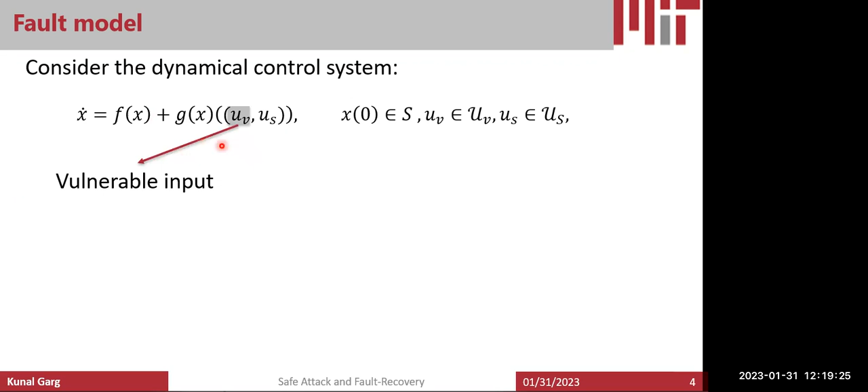We have some vulnerable inputs and some secure inputs, where we assume that these inputs cannot be attacked. These inputs cannot be modified from what was assigned by the user, and these vulnerable inputs can be manipulated in arbitrary ways as long as the assigned signal is still in the compact set of allowable signals, right? Even if we assign an arbitrary signal, the actuator itself would have some sort of saturation because of its physical limits. So we still consider that, but other than that, the signal could be anything.

A simple example would be either a faulty actuator in a quad rotor, in terms of the propeller itself or the motor being faulty, or you get an attack from an extraneous entity on one of the communication signals to the motor. What it can lead to is either loss of partial or full actuation in the control surface, and that would lead to certain issues in the normal behavior of the quad rotor. And we want to make sure that at the least the quad rotor should not crash on the ground.

It might not be able to track its desirable trajectory. It might not reach its goal point in the given time or as smoothly as we want, but the least we want is that it should not crash. It should not collide with the obstacles. It should not crash on the walls or on the ground or on the ceiling or wherever the safety boundaries are, right? So we can have faults or cyber attacks on these input signals.

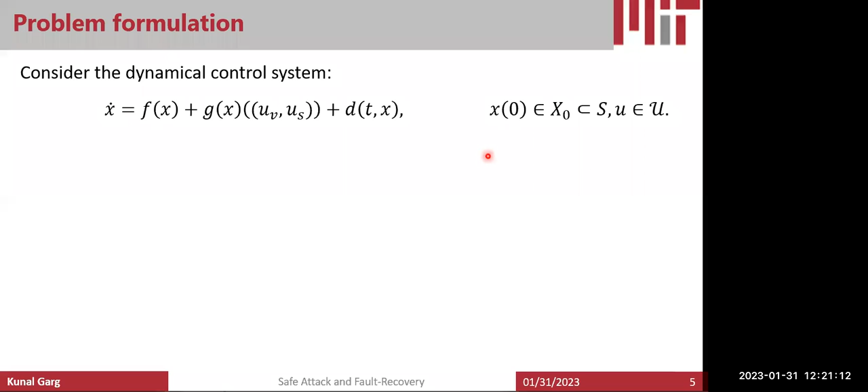So more formally, the problem statement that we consider is along the lines of what I described in the previous slide: given this system, given a safe set S, which determines where our system should remain at all times, and given the attack model dividing the input into this particular partitioning, what we want to design is first an attack detection mechanism. So we should be able to detect that something is going wrong with the nominal operation of the system.

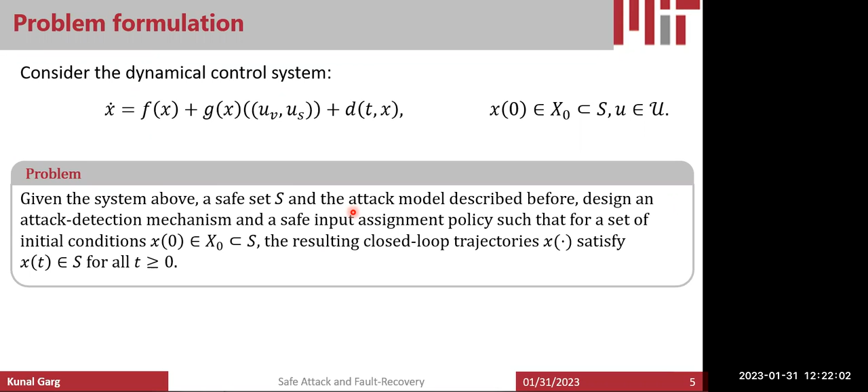And then a safe input assignment policy such that if our system starts in a particular subset of the safe set, resulting closed loop trajectories should remain in that safe set at all times, even under those attacks or faults. So we do not want our system to leave the safe set at any given time. So let's see how we deal with this problem of guaranteeing safety under cyber attacks or faults.

I know a lot of people in our audience would have a good background in control barrier functions, but I'm going to give a very brief overview just in case some of you are not familiar with what control barrier functions are. So consider this general nonlinear dynamical system and assume that the safe set given to us is a zero sublevel set of a function B. So it's basically a closed compact set which is defined by some function B.

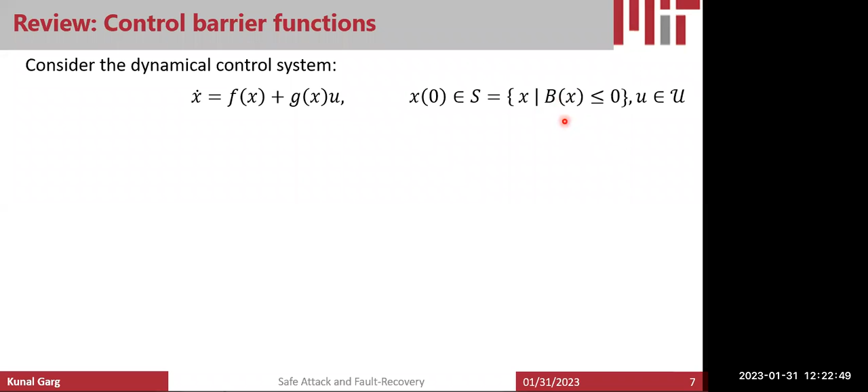And we say that for this set S, this function B is a control barrier function if such an inequality holds at each point on the boundary of the safe set, which basically means that if you're on the boundary of the safe set, you are able to find a control input such that your system trajectories do not leave the safe set.

And the implication of existence of a barrier function or control barrier function is that you can design a control policy for the system such that if you start in this set, your system trajectories would remain in this set at all times. And this is what we call forward invariance of the set. And that's what we need.

I mean, if the safe set is essentially everywhere above the ground floor or away from the walls or below the ceiling, if that's our safe set, then essentially we want our system to remain in that safe set and not collide with the walls or crash onto the ground and whatnot, right? So this is how we can formulate the safety requirement using this notion of control barrier functions.

Right. So then how do we ascertain that the system might remain safe under attacks? So again, we go back to this model that we consider, the fault model or the attack model. And then we consider this function, which is basically the modification of the function that I showed on the previous slide. And what we are doing here is we're just saying that even under the worst case possible signal that can go into the system, the system should still remain safe. So whenever we are on the boundary of the safe set, even under worst case possible signals that can be injected into the system, this function H should always remain non-positive, and that would guarantee safety.

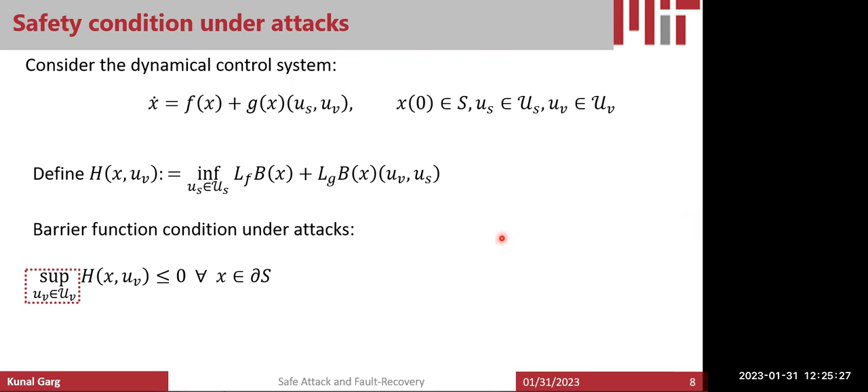All right, so what's an overview of the approach that we take here? It's essentially very simple. First, we design a nominal feedback wherein there is no attack. We have a barrier function. We can assign a nominal input for the system to remain in the safe set. Then we use a different policy when there's an attack where we do not design the vulnerable inputs, because even if we design them, the system is not going to use them. So we assume that we do not have those inputs and they are actually acting adversarially. And we only design the safe or the secure inputs, and we are going to use them when the system is under attack.

Oops. Oh, I pressed end and somehow we reached the last slide. All right. I'll just quickly go to that slide here.

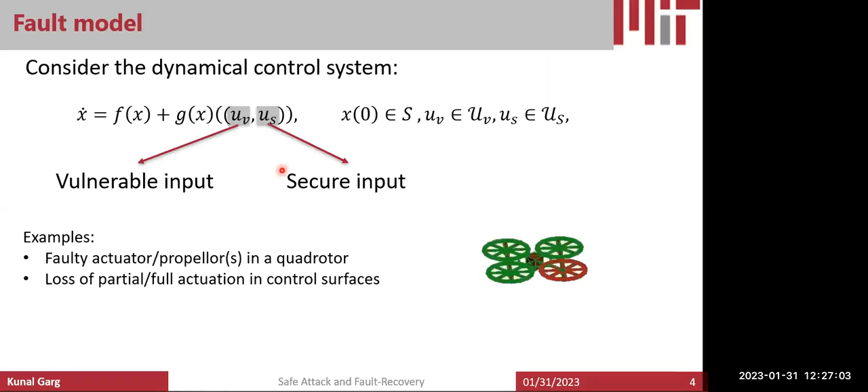All right. Yeah. So one of the issues in the approach that I described, where we can use the derivative of the barrier function to detect whether there is an attack or not, is that we cannot evaluate the derivative of the barrier function, right? And the issue is we do not know what input is going to the system. We are designing a particular input, we are assigning a particular input, but that input is not going into the system. If there is an attack or a fault, this U signal is getting modified and we do not have access to the actual U that's going into the system. And so it's not possible to evaluate B dot exactly, particularly when there is an attack or a fault in the system, right?

So then what we can do is just use a first order approximation, right? We can assume certain smoothness properties of the system dynamics and system trajectories and the barrier function itself. And then we can say that, using the first order approximation, which is just taking the difference of the consecutive values of the function itself, we can find an approximate value of this derivative within certain error bounds, right?

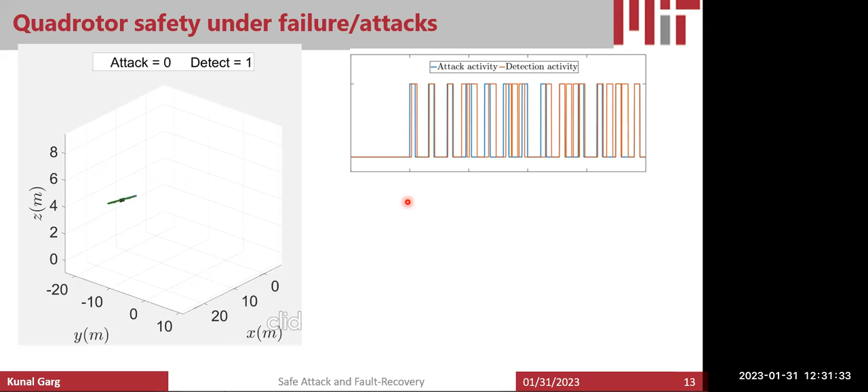There are some false negatives, there are some false positives, but the end result is that the system never crashes on the ground. Anytime it deviates from its nominal trajectory as dictated by the derivative condition of the barrier function, we basically go into what you can call a fail-safe mode, and then we just stop using this 4th motor, and we design the other 3 motors to keep the system safe in the sense that it should not crash on the ground.

And then this plot shows that the attack signals that we used without the detection mechanism would have been able to crash the quadrotor, but using this detection mechanism, we are able to recover it and keep the system hovering at this altitude of 5 meters. So that's essentially what we are able to achieve.

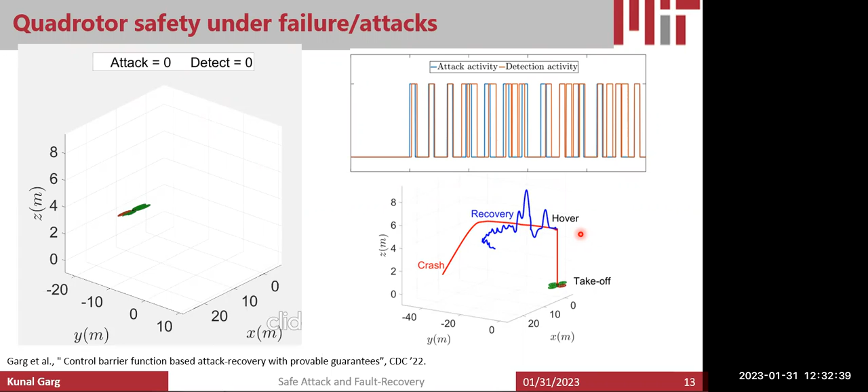Yes, go ahead. Kunal, is it also figuring out which motor is being, I know you said without loss of generality, you can assume motor 4 is the one that got damaged. Yeah. But is your detection also detecting which of the 4 motors is? So this particular mechanism doesn't do it. Right now, this mechanism assumes that we know which actuator is faulty, right? And then we can just detect that something is going wrong with the system, and because we assume that that particular actuator is faulty, we take actions with respect to this particular knowledge. So that is something that we are doing here.

But basically, that brings me to the next part of the presentation, where we want to do a more realistic fault detection and identification. So the issue with this control barrier function based fault detection was that, first of all, it assumes that we have a control barrier function. We have the function B that we evaluate and use for detecting the fault, and we assume which actuator is faulty, right? So we do not want to make these assumptions. Realistically speaking, we might not have this knowledge, right? Any of the motors can get faulty at any given time, and any of the motors can get attacked at any given time. So this is something that we want to relax.

Now, some of the prior work on fault detection and identification essentially uses what is called residual information. The idea is that you have the actual output of the system, which you can imagine as just the system state information, and then there's some predicted output of the system, which is generated by assuming that if there was no attack or no fault in the system, where the system trajectories would be. So you generate the artificial output and you have the actual output, you take their difference, and you try to detect if something is wrong based on this residual. If this residual is bigger than a particular quantity, then you flag that there's something going wrong with the system.

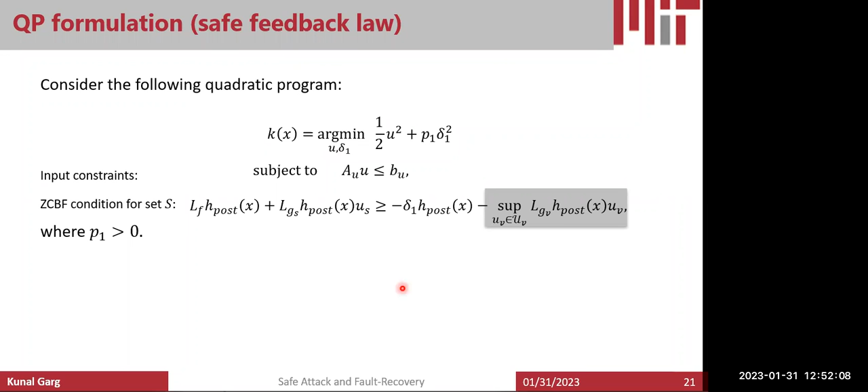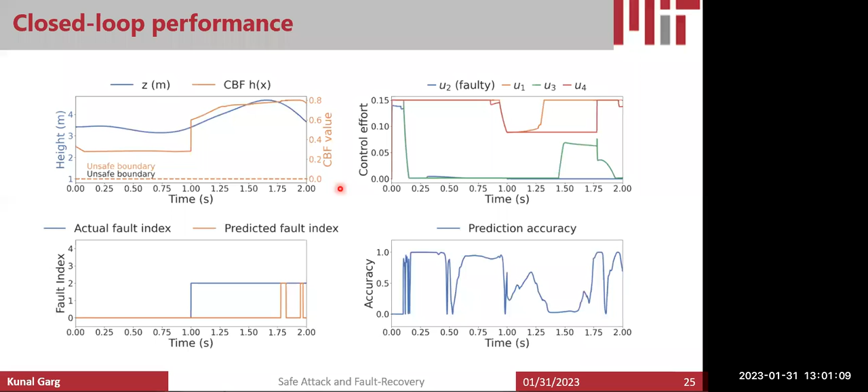And that's something I've still yet to explore, because that's one of the problems I've always had with neural net papers, that all the guarantees, well, I don't want to call it guarantee. There's no guarantee, but all the performance metrics are always with respect to these accuracy measures, right? Out of 100,000 trials, 95% of the time we were correct. So that's very good. 95% is seemingly a very good accuracy, but that one instant out of those 5% where you are not good, if that is your trial during the actual run, what would happen? System would fail, right? So no one talks about that.

I'm not saying that I would be able to achieve 100% accuracy at any given point, but how do we bridge the gap when we are not confident that our trained neural nets are good enough, but at the same time we do not want our system to fail? This is something we are still exploring. I think at the end of the day, we still need to use some sort of fail-safe measures in our implementation to do something about it when the system fails.

I can imagine there has to be some sort of robustness again, at least to some epsilon of accuracy not being 100%. So at the control barrier function side, when you're writing out your actual final controller, you have to assume, I don't know how exactly you do this because it's not a robustness condition, but you have to be somehow robust to having mispredicted that your system is safe.

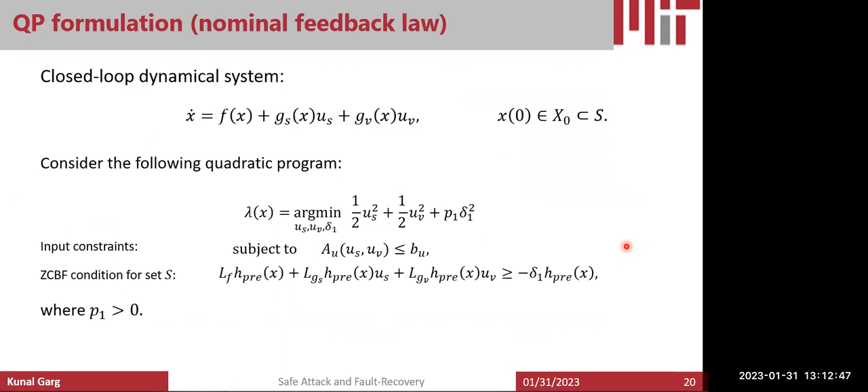Here's another question, Kunal. I'm curious about the comparison of this approach versus adaptive control. I know recent adaptive control methods have started trying to throw neural networks into the mix to adapt to that. So what would you say the differences between this control barrier function approach and adaptive control are? So not much, I would say.

So essentially, if you go back, there was this particular slide where I was presenting the basic idea. Here I'm just saying that my U is modified, particularly for the fault detection part, right? So there's this theta parameter that affects my U, and this theta parameter is unknown, and it's constant also. It's not even time varying. At some particular point, one of the components goes to 0 and stays 0, and everything else is 1.

So the initial thought that came into my mind was also to pose it as an adaptive control problem, right? What I would do is learn the theta dynamics, and then update theta in real time. I would have a theta hat, and I would design everything with respect to that theta hat, and I would hope to get better results. So, which was all fine.

And then I thought, there is some work on that, but for you to be able to guarantee that the theta dynamics converge to the actual theta and that your system also has a certain performance, you need to make a lot of assumptions that you are getting rich enough data from your system trajectory. So you cannot always guarantee that your theta would converge. You need persistence of excitation and whatnot.

So then to remove all those complications, what you can do is, instead of using a dynamic to predict what theta is, you can actually just learn this theta, again, just generating that persistent trajectories for that training, and then store everything offline, train it, and then have a neural net, which is basically replicating that theta hat dot dynamics, where you don't need any persistence of excitation in real time. I mean, almost always you would not need that.

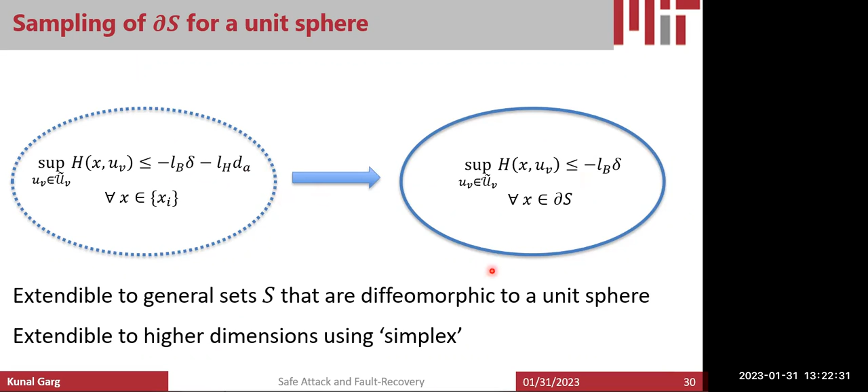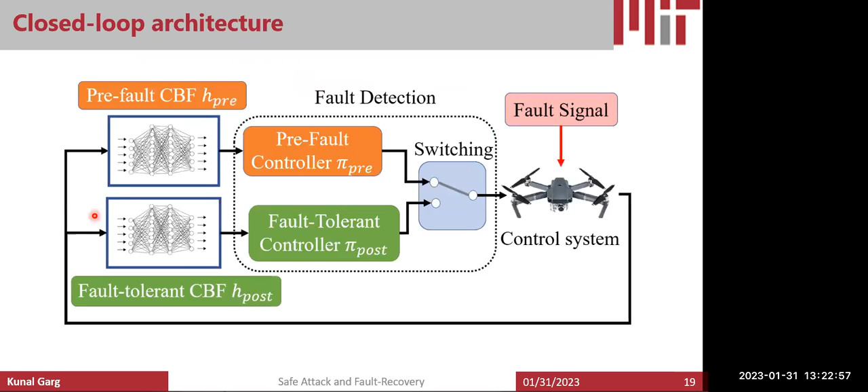You're assuming you can sample on the surface. We are only sampling on the surface, yeah. Okay. So one thing I was focusing on in this work is you don't want to learn the CBF everywhere. At the end of the day, what you're concerned about is the CBF inequality on the boundary. There are different notions and definitions, but when we subscribe to this particular definition, this inequality should hold on the boundary.

Something can happen inside, something can happen outside, we don't care. As long as this inequality holds on the boundary, we can guarantee that the system is safe. So we only want to sample on the boundary and check if this inequality holds for a particular function. That's why it's more efficient, because the boundary is just a zero measure set, and it's very efficient to sample it and check those n number of points.

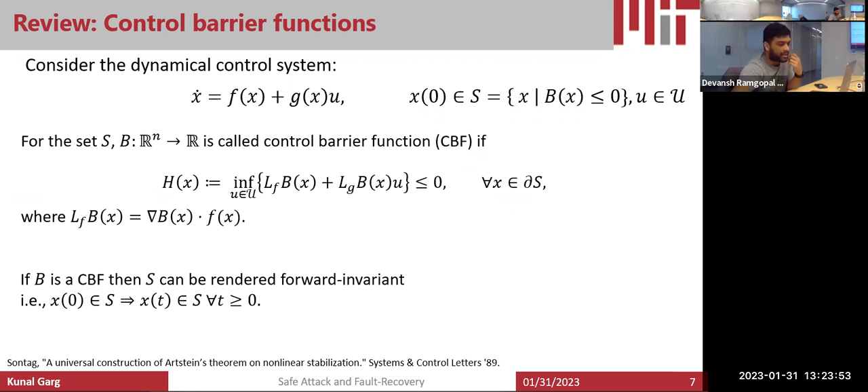But generating a random sample on some boundary, even if it's a level set curve, that's the computationally tricky part as well, right? So it's not random. We don't do random sampling. Random sampling would be very inefficient. So we actually propose algorithms for how you do sampling.

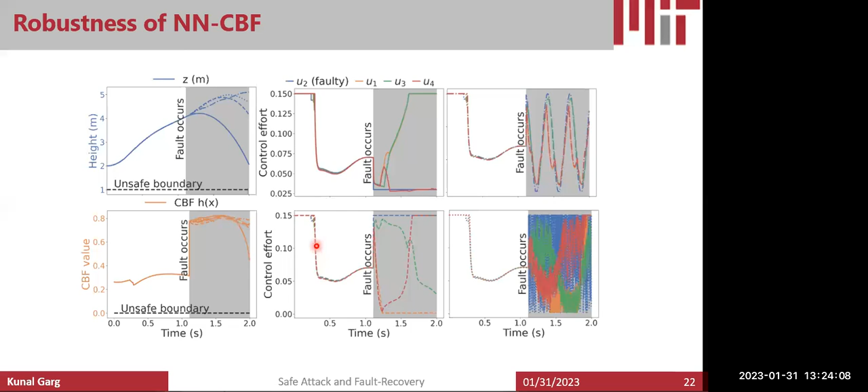So we say that, assuming that the sets are compact and they are smooth enough, they are diffeomorphic or at least homeomorphic to spheres. What you can do is there are triangulation algorithms available online that you can use, and they're very efficient. They do sampling in like 0.1 second, they generate 100,000 samples. Really? Yeah, triangulation is very, very efficient. And for higher dimension also.

I can only show a figure in 3D, but you can imagine in 4D, 5D, ND, you can have simplex, right? And then you can still do the sampling. And then we extended our own algorithms. I don't think I have it here. Let me see if I have my algorithm. I might not have, yeah.

But the idea was that, again, you can exploit symmetry, and starting from one dimension, you can sample 2D. Using those samples in 2D, you can sample 3D, and then from n minus 1 D, you can sample nD. And we showed that even simplex takes like 0.1 or 0.2 seconds for everything. And my algorithm took like three orders of magnitude less. It took like 0.001 second for sampling a 10-dimensional sphere, so it's very efficient.

So let me see if I understood this right. Let's say we were trying to stabilize a quadrotor. We're trying to find the Lyapunov function and a controller. So this is not for stabilization or Lyapunov functions. This is for safety. This is for barrier functions. For a Lyapunov function, you have to sample the whole state space, right. Okay. Yeah. So this is only for safety.

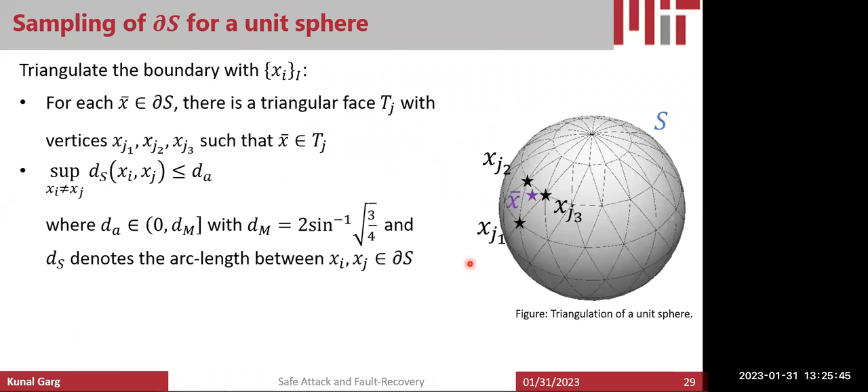For Lyapunov functions, we did something similar. That's still work in progress, I'm working on that paper, but the idea is you sample this and then you go inside and sample another boundary, then another. I have a paper on that, but we are yet to submit. The idea is you can find the distances between different surfaces and between points on a particular surface, and that would dictate the number of sampling points. And we showed that it's actually going to be linear in the system dimension.

And with those many points, you can sample not the whole state space, but any compact domains in that state space. And you would be able to assess whether an inequality holds everywhere in this compact domain using those finite number of sampling points. And we have a very, very efficient algorithm to do that.

Very cool. I'm definitely interested to learn more about this because I've been trying to think about how, let's say we've got a quadrotor trying to fly around some space. That means we have some sort of safe convex polytope that you have to stay within. Let's say it's centered about the current quadrotor position. That means the only real variable is the velocity of the quadrotor. So now I want to certify what set of velocities or forces on this quadrotor are going to keep it safe. So I want to grow some sort of barrier function on the inside of this polytope, and then certify that I can be safe against multiple constraints at once.